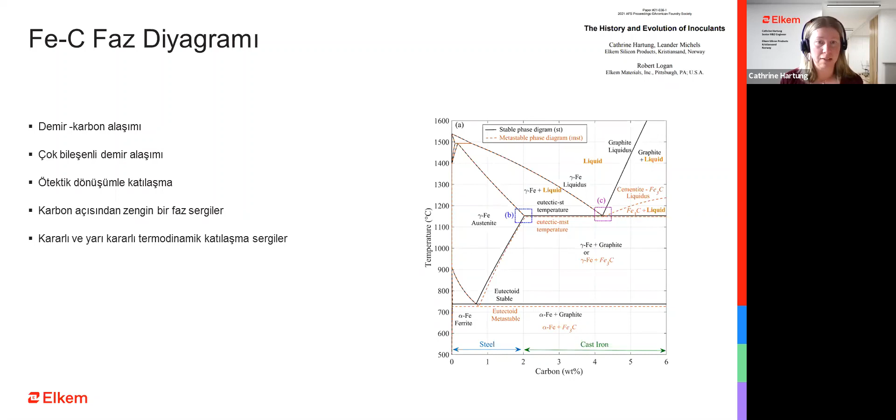In this slide, we see a close-up of the eutectic point, and we see that this system actually consists of two. The eutectic point represents the transition from liquid to solid. For cast iron, what happens here is that a simultaneous nucleation and cooperative growth of the iron-rich phase, austenite, and carbon-rich phase takes place.

In cast iron, the carbon-rich phase can either be graphite if it solidifies according to the stable system, represented here with the black lines, or it can solidify in the form of cementite or iron carbide if it solidifies according to the metastable system. A majority of commercial cast iron grades rely on carbon coming out as graphite to obtain the required properties, and solidification according to the metastable system needs to be avoided.

From this iron-carbon phase diagram, we see that the temperature window between the stable and metastable system is 4.6 degrees in this case, or around 5 degrees. But fortunately, cast iron is much more than iron and carbon, and the good thing about these other elements in cast iron is that they increase this window from around 5 degrees to around 60 degrees. So to avoid cementite, solidification has to start, and preferably end, between these two lines. The closer you are to the eutectic, the black line, the more safety you have against forming carbides. And it is here that nucleation and nucleation potential come in.

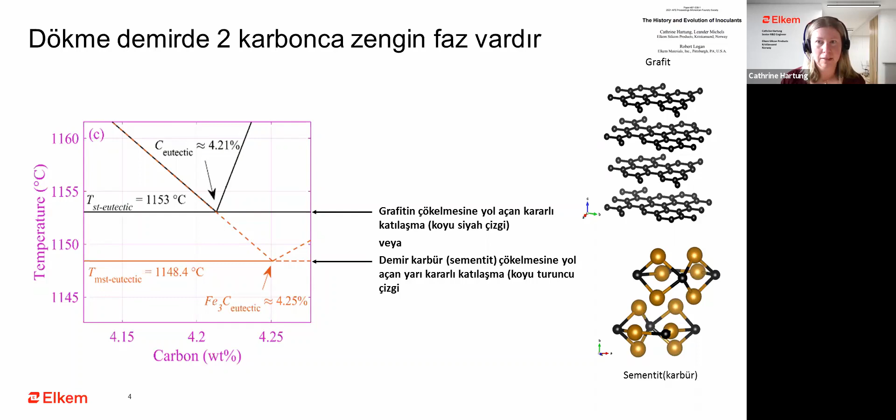The nucleation of graphite in cast iron will be heterogeneous, as it requires less undercooling, within the temperature window shown before, maybe 5 degrees, but with the chemistry you could have a window of around 20, 40, maybe up to 60 degrees. It is not feasible to have homogeneous nucleation, because that typically requires more than 100 degrees of undercooling before it can start. So both gray and ductile iron rely on heterogeneous nucleation of graphite.

During heterogeneous nucleation, the graphite nucleates and grows from a foreign substrate. This process requires less undercooling and is in line with observations from thermal analysis and microscopy data, which show solidification taking place at a higher temperature and lower undercooling than 100 degrees, without a lot of cementite in the structure. Nucleation potential is then a measurement of the number of suitable substrates for graphite nucleation, and says something about how easy it is to nucleate graphite.

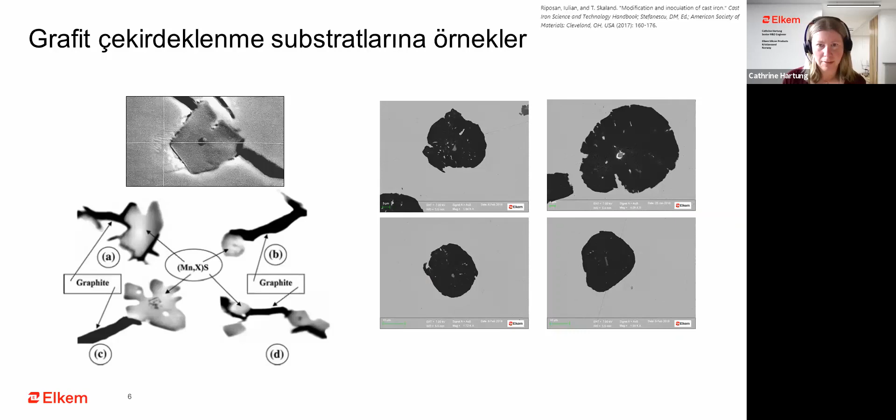With inoculation, what we want to ensure is that as much as possible of the solidification takes place within the stable system, giving us carbon in the form of graphite, either as flake, compacted, or nodular graphite.

The effect of inoculation can easily be seen and measured on a chill wedge, as shown here. I am holding different chill wedges from an inoculation trial in gray iron, where we used different inoculants on the same iron. As you can see, there are different amounts of white in these chill wedges.

The terms gray, mottle, and white are reflected in the fracture surface and are a measurement of the amount of chill. When I say white, or a light area, in these fracture chill wedges, this is the carbidic amount of solidification. The zone with a mixture of both gray and white is called the mottle zone, and where it's completely gray, you have the stable solidification, or graphite coming out.

So this fracture surface of a chill wedge is a very easy measurement that can be used for measuring inoculation or nucleation potential, as it gives an instant response, and it can also show differences between different irons or different inoculations.

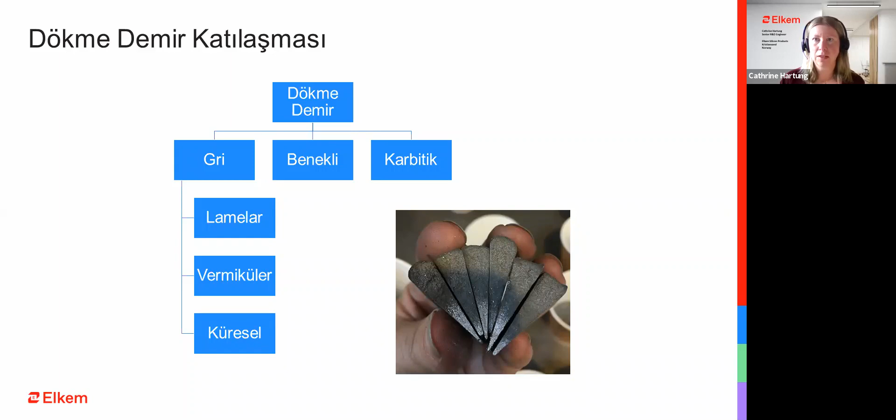Here are the different types of graphite in cast iron, where graphite grows differently: either lamellar, compacted graphite, or nodular structure. The chill wedges are easy to use for gray iron and partly for vermicular iron. For ductile iron, you need to cut and polish them to see the same structure shown here.

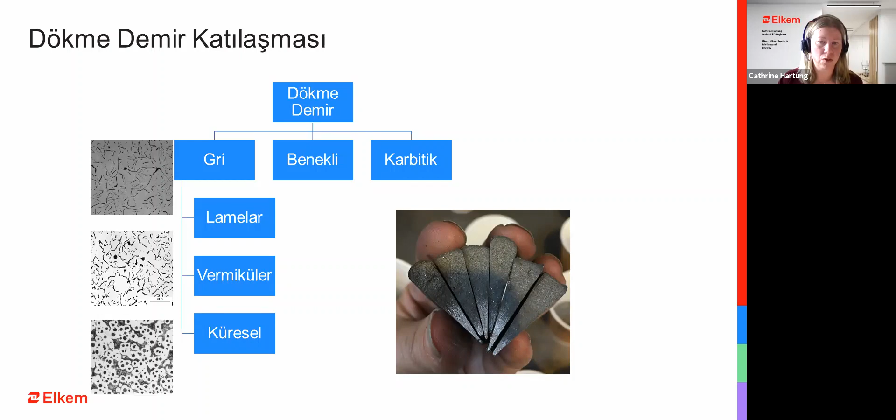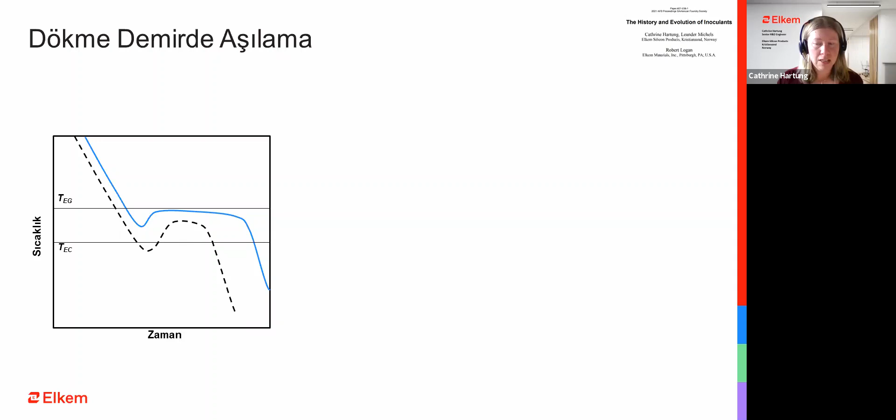In this slide, we will take a look at the principal effect on the cooling curve and microstructure of gray and ductile iron from inoculation. The cooling curve, which we can see here, comes from thermal analysis. It's a time temperature curve of the solidification process, so phase transitions are seen as arrests, and this curve can be used to evaluate nucleation conditions of the cast iron. The line TEG is the solidus line for stable solidification, where carbon is precipitated as graphite, while TEC is the solidus line for metastable solidification, where carbon is precipitated as cementite. This reflects back to the phase diagram and the black and orange line: TEG is the same as the black line, while TEC is the same as the orange line.

One key parameter often looked at, which we have learned from the slides on solidification and nucleation is important, is the undercooling needed before solidification starts. This undercooling can be seen in the cooling curve as the temperature difference between the low eutectic temperature and the TEG line, and this is the low point that you see before it increases again and flattens out.

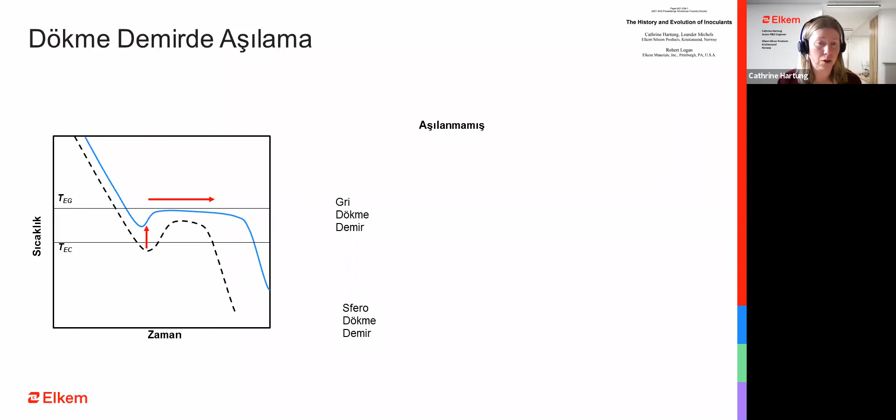If you press again, you see the vertical arrow represents the TE low, and you see that inoculation lifts the curve. So instead of having solidification starting below the metastable line, the solidification now starts between the lines. The other part that inoculation does is give you a longer curve, so you have more carbon coming out as graphite when you inoculate compared to when uninoculated. The blue line represents inoculated, while the black dotted line represents the uninoculated condition.

As you can see, before you inoculate, the structure looks either in gray iron, a mixture of undercooled graphite and better looking graphite, while in ductile iron you predominantly have carbidic structure because your solidification starts below the metastable line, though you get some nodules coming out. But predominantly it is an undesirable structure.

So inoculation, press next, transforms the structure from unacceptable to acceptable. The purpose of inoculation is to change the structure from carbidic and undercooled to fully flake or spheroidal graphite. This gives you the properties you're after in cast iron, compared to a hard, brittle material, which is the result if you have solidification according to the metastable system.

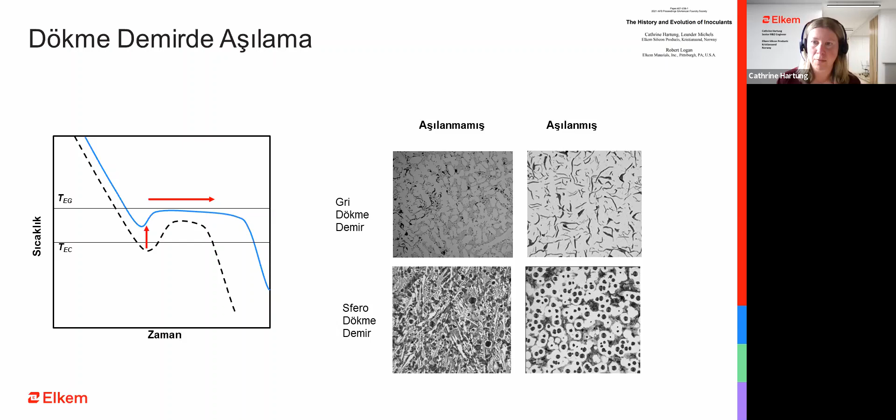Next. So the goals of inoculation are to avoid the formation of carbides and promote formation of graphite. You reduce segregation and reduce shrinkage. You have improved machinability and a more homogeneous structure and properties throughout the casting. It reduces hardness and increases ductility.

Next. So what is an inoculant? By definition, an inoculant is an alloy which, when added to cast iron, modifies the structure and thereby changes the mechanical properties. These alterations in the structure and properties cannot be explained by the minor changes in the chemical composition of the iron resulting from the inoculation.

The difference with a good inoculant is that you can use so little that you do not change the composition of the iron itself. If you have to use a considerable amount of inoculant, you will also experience a change in chemical composition, because normally the inoculants used today are based on ferrosilicon or have silicon, and silicon will change the carbon equivalent of the iron itself. But if you have an inoculant that is highly effective, the addition is so little that it shouldn't have an effect on the chemical composition itself.

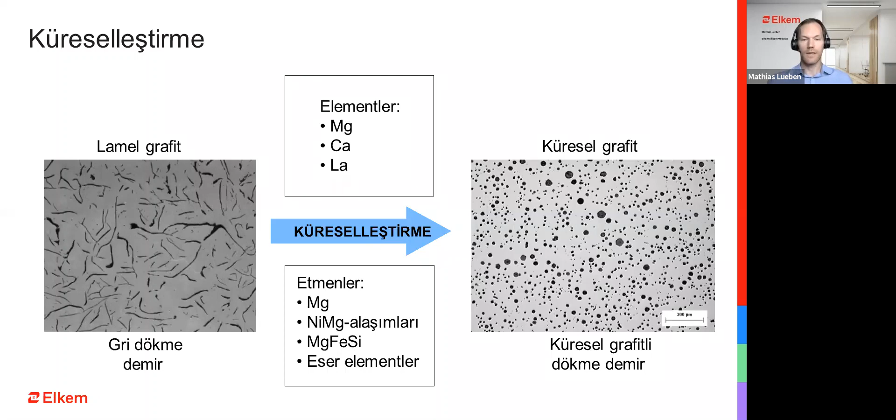Let's have a look at the efficiency comparison. Just a quick look at the upper left side. Treatments with high magnesium content or pure magnesium, like cored wire or the converter. The use will result in a violent reaction with lots of fumes and slag formation. We will have a low magnesium recovery and no inoculation effect at all.

Take a look at the green circle. Treatments with low magnesium containing alloys will result in a high magnesium recovery with proper inoculation effect. And the treatment will cause less fumes and slag formation.

So at the end of the day, with a magnesium ferrosilicon treatment, you will achieve a high treatment efficiency, reduced fume and slag, a cleaner iron, superior metallurgy, low consumption of magnesium, reduced energy cost. You will improve your casting yield, and in the end, you will get lower reject rates.

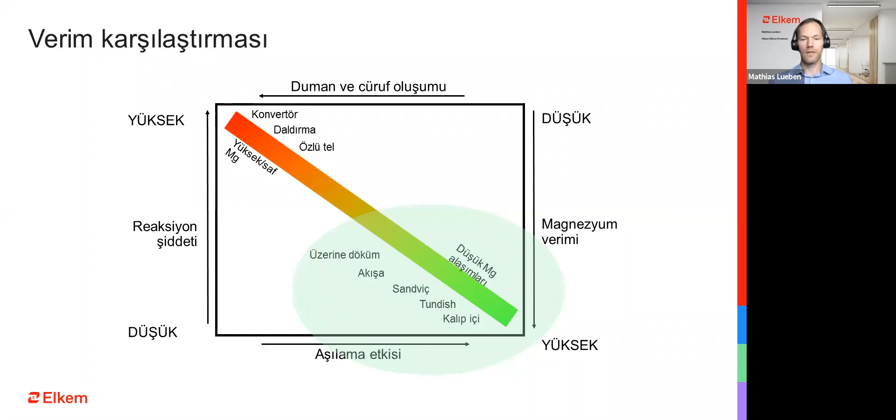Here you see a comparison of different ladle treatment methods. On the left side, the simplest approach, the pour-over treatment. In the middle, the sandwich treatment. The treatment alloy is covered with a cover alloy. We will talk about this later.

And on the right side, the advanced treatment process, the Tundish cover. The ladle is covered with a lid, and at the bottom, there's a pocket for the treatment alloy and the cover alloy.

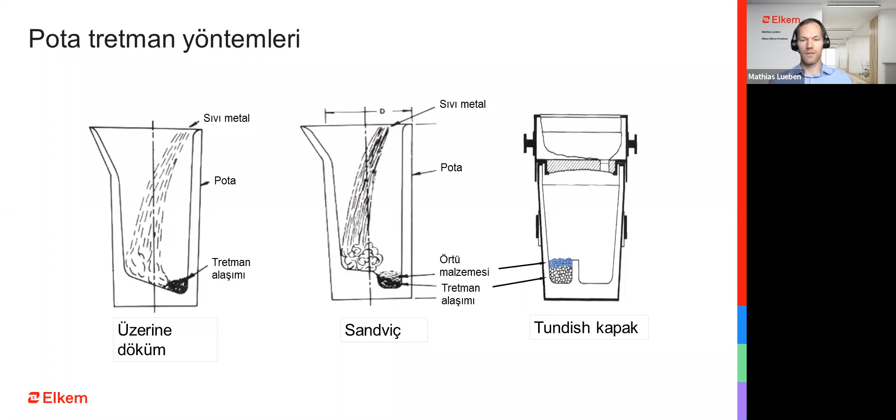Some aspects on ladle and pocket design. An optimized ladle design achieves the following advantages. You will get a high recovery, as you can see, with a proper height to diameter ratio of 2:1.

It is possible to achieve high magnesium recovery of about 80% with a consistent reproducibility. With this kind of ladle construction, there's no flare and about 90% fume reduction without any metal splashing. Minimum carbon and temperature losses are also achievable.

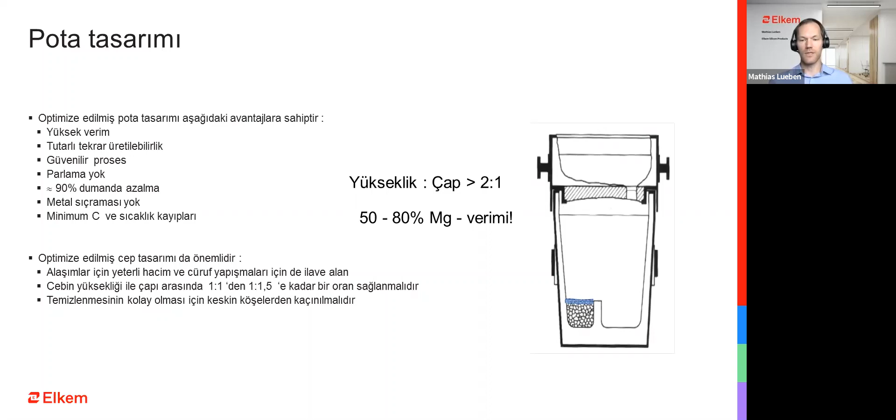Also important is an optimized pocket design. Please think of a sufficient volume per alloys and additional safety space for build-up. Ratio for the pocket of 1:1 or up to 1:1.5 between height and diameter of the pocket is recommended. Important is also a pocket without sharp corners, which is easy to handle to keep it clean.

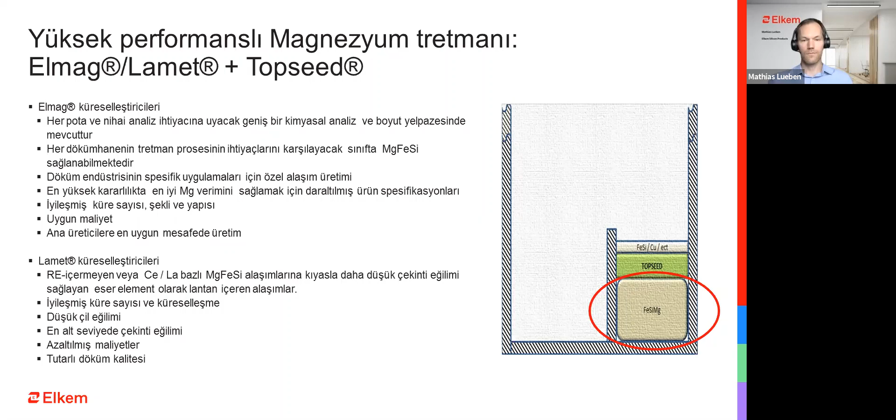Next slide, please. And again, one click.

Let's move over to our cover alloy, Topseed. A sandwich cover is recommended to obtain maximum treatment recovery. The purpose is to retain the alloy in the pocket for as long as possible before the reaction starts.

Topseed addition compensates the negative effect of magnesium treatment. It will add further inoculation effect. This can be seen in thermal analysis curves. It stabilizes the metallurgical quality after treatment, providing more robust processes, and this is reflected in the structure and mechanical properties of the casting.

Topseed is available in two versions with 2 or 5% barium and in 2 different grain sizes, as mentioned in the table below.

Topseed with barium is able to provide effective management of slag behavior. The result is cleaner iron, important especially for automated pouring equipment. The iron is less prone to promote slag and dross inclusions. Finally, it will result in a longer lifetime of the refractory.

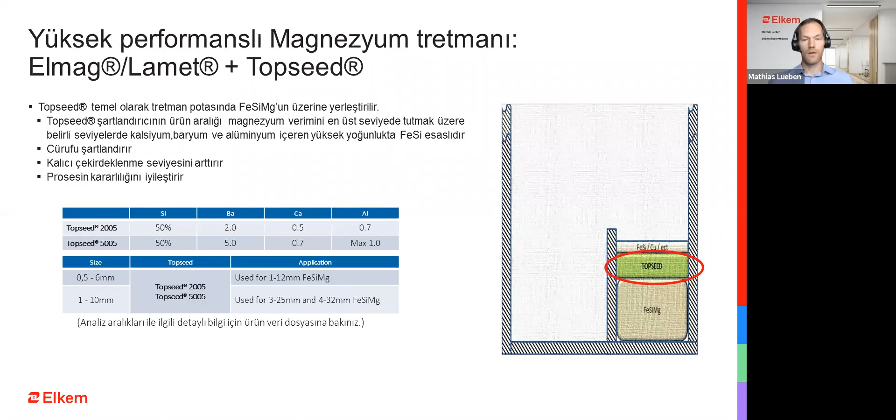Typical addition rates of Topseed are 0.3 to 0.4% of Topseed 5 for well-designed ladles and pockets, and low magnesium containing FeSiMg. About 0.7 to 1% Topseed 2 is recommended for poorly designed ladles and pockets with high magnesium containing FeSiMg. To explain it a little, a poor ladle is one with a low ratio between height and diameter, no pocket, or also a low ratio.

Or a pocket so tight that it's really hard to clean. A good, well-designed ladle, on the other side, has got a ratio of more than 1.5 between height and diameter. The Elkem recommendation is a ratio of 2. It also has got a well-designed pocket with a ratio of up to 1 to 1.5, no sharp corners, and easy to clean.

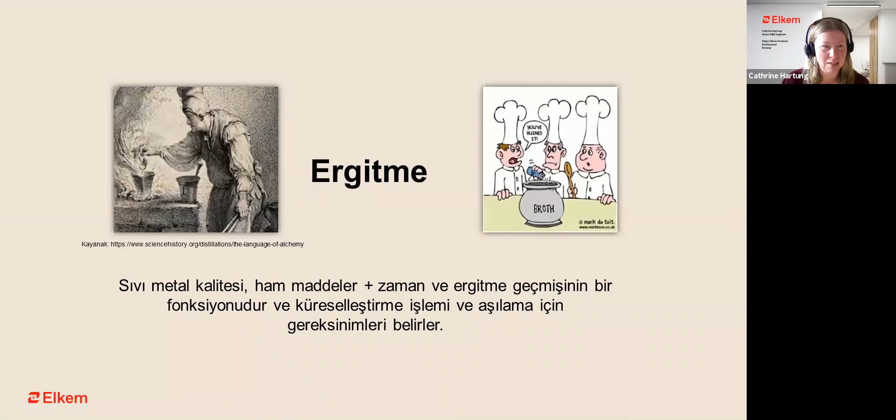First, melting is actually what determines the melt quality. So the choices that you make when it comes to the raw materials, the time and the temperature you use, or the history of the iron, determines the requirement for nodularizer treatment and inoculation. It's like cooking: to make a good soup, you have to have good ingredients and a good plan or recipe. Same with cast iron. Next slide.

So the job of the inoculant is to ensure that the solidification occurs above the metastable line. And the closer it is to the stable line, the black dotted line, the better the structure will be.

Here in this case you see an example from our lab in Kristiansand, where we have 3 different irons. The first iron here is uninoculated gray iron, and you see the actual curve with the actual structure. As you're improving the inoculation, going from uninoculated to adding inoculant—but this can then be not adding enough, or a different type of inoculant—it will change how this curve places itself between the 2 lines. But the purpose of the inoculant is that it should lift the line as close as possible to the eutectic, and the solidification should stay and end before you dip below the eutectic metastable line. But as you can see, with inoculation, the structure improves.

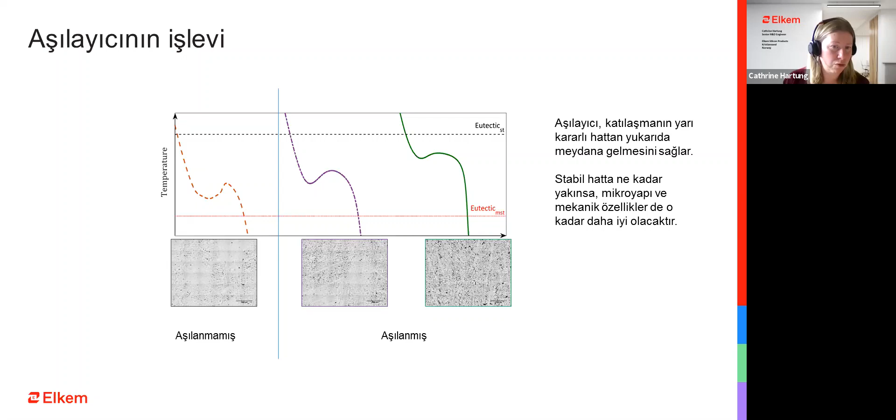We have to go back a little bit on the iron. Next slide. So take a recap from the first presentation and look at the phase diagram and the eutectic. We have the 5-degree difference between the stable system, the black system, and the orange system, which is the metastable.

Cast iron, luckily, consists of more than just iron and carbon, and all of them affect the stable and the metastable line—they can either push these lines together or open them up. One of the most important elements, which we have a lot of in cast iron, is silicon. Silicon is really nice because it opens up this window: instead of 5 degrees, depending on the silicon level, it becomes 20 to 60 degrees. That gives the iron more time to get nucleation started and to complete the solidification in time. So that's the recap.

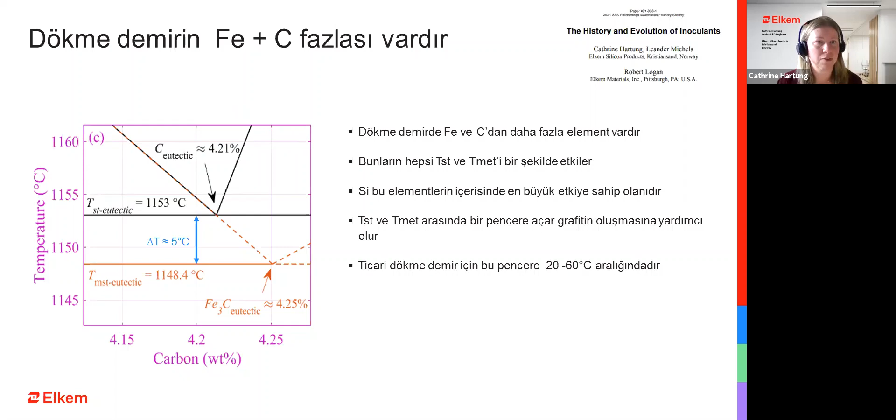And then we come to nucleation potential and thermal analysis. Thermal analysis can be used to read nucleation potential of a melt. I used a figure here from the article referred to at the top of this slide from Novacast. Thermal analysis is actually just a time temperature curve, as mentioned.

The different points in the curve have defined names and represent the solidification. The TL is the start of the liquidus, and the TE low is the lowest temperature before nucleation starts of graphite.

There are different names of the different parts of the curve depending on which kind of software you're using, but the arrests and the different parts of the curve are the same regardless of which thermal analysis system you're using. It's just a slight difference in where the definitions or points are, depending on how the software smooths the curve. But the parameter of interest when it comes to nucleation potential is the TE low.

The TE gray here represents the eutectic stable line, while the TE white represents the metastable line. The nucleation potential is then the temperature difference between the TE low and the TE white line, or you can measure it versus the TE gray line.

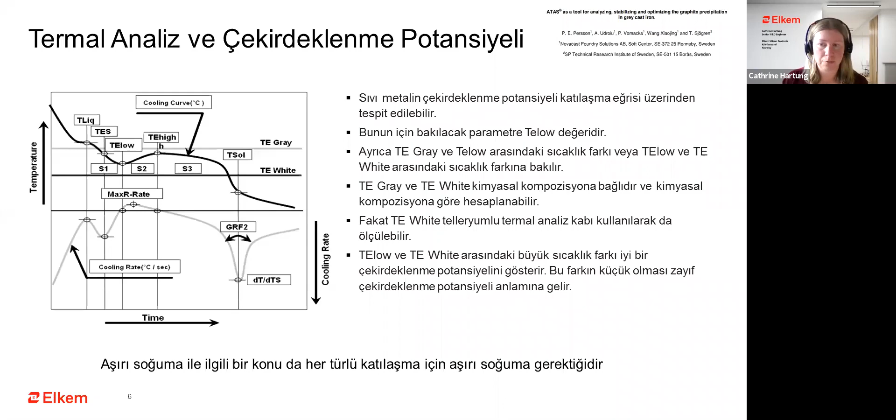Next, to the difference between gray and ductile iron. In gray iron, the nucleation condition improves with increasing carbon and carbon equivalent. You can say that gray iron is actually a self-inoculating material, or the inoculation condition improves with increasing carbon and carbon equivalent.

This is represented here on the curve to the right, where you have a representation of the liquidus temperature, which is the line that crosses down to the stable eutectic temperature. Then you have delta T, which is the undercooling after inoculation, and delta T0, which is the undercooling needed before you inoculate. As you see, the undercooling before inoculation in gray iron improves with improving carbon equivalent.

So as a result of this, it is expected to see a decrease in undercooling needed to initiate graphite nucleation with increasing carbon in gray iron. And TE low as a result of this will also increase with higher carbon and higher carbon equivalent.

So ultimately, a high strength gray iron will typically have lower carbon content or carbon equivalent, and will therefore have more undercooling because you are more to the left in this diagram, versus a high carbon equivalent gray iron.

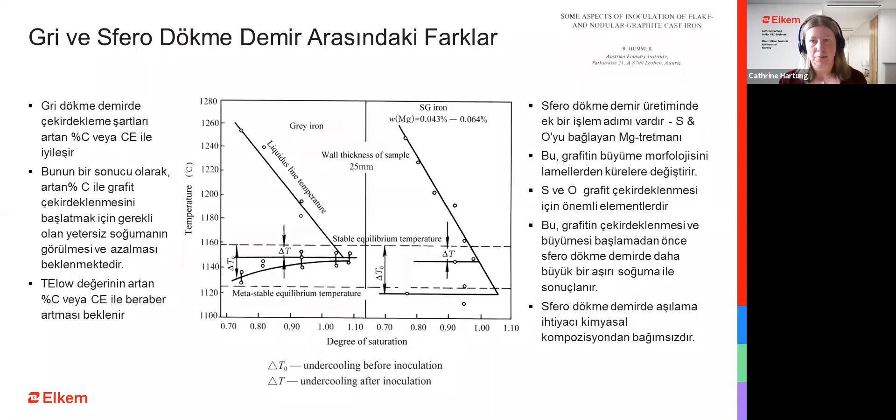Next, we come to our first example where we compare superseed versus foundry grade ferrosilicon. I think one of the most popular inoculants in gray iron production is just ferrosilicon, or foundry grade ferrosilicon.

The other very popular inoculant used in gray iron inoculation is superseed, or strontium containing inoculant. In this slide, we see a comparison of superseed versus foundry grade in two types of gray iron: one with low carbon equivalent, around 3.9, to the left, and one with 4.4 to the right. So you have what we call low, or hypo, and hyper, or eutectic gray iron.

We show the different parameters typically associated with nucleation and inoculation, which is chill. And then we have the most common thermal analysis parameters used. We have TE low, the recolescence, the graphite factor 1, which is the length of the curve. I believe in the EPIC or Elkem thermal analysis system this is equivalent to the LET, or is it ST? And the graphite factor 2 is the angle at the end of the solidification curve. Then we have the solidus temperature.

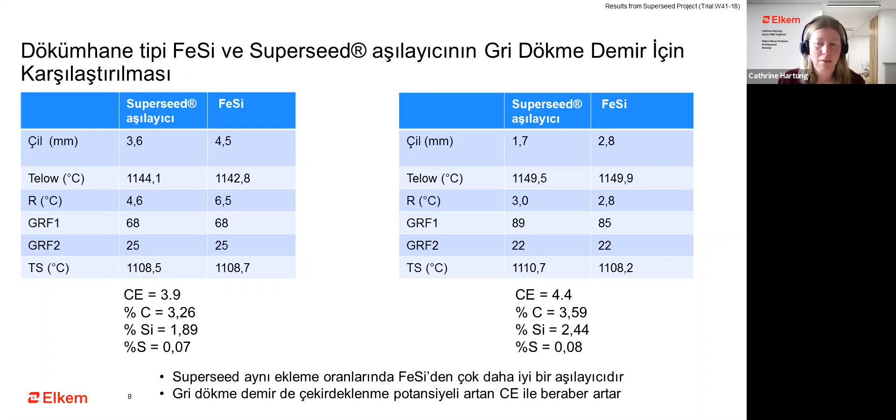Now we go to the next case example. Superseed inoculant was developed specifically for high strength gray iron back in 1966. At that time, the inoculants used were ferrosilicon, high silicon ferrosilicon, or this SMZ type inoculant. But for all of these, you had to add quite a lot to get chill reduction, and with a larger addition you also change the chemical composition. So superseed brought the possibility to add considerably less.

Remember, at this time the dominating inoculation method was ladle inoculation. Today we are stream inoculating. But it's still designed to give maximum chill reduction with the lowest possible addition, and thus minimum additional silicon, so you retain the maximum amount of strength from the chemistry of the gray iron — because in gray iron it's predominantly the carbon equivalent that determines the strength. You use silicon to offset carbide formation during solidification, but at the expense of higher shrinkage risk. This was a very successful product when launched, and today we see many different strontium containing inoculants from many different suppliers.

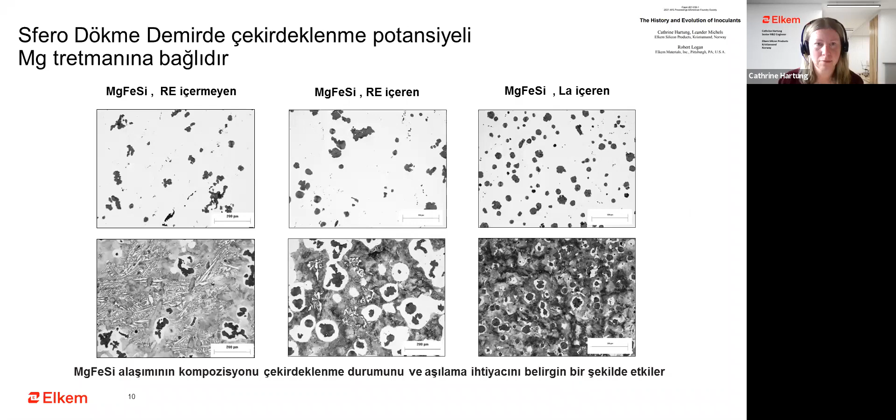So we go to an example in ductile iron and look at the difference in performance of Reseed and Foundrisil. Foundrisil is a calcium barium inoculant, which can be used for both gray and ductile iron, while reseed is a cerium-containing inoculant specifically developed for ductile iron, especially ductile iron treated with pure magnesium, or where there is low sulfur and oxygen after the treatment, where you have a high need of an inoculant and a good performance of the inoculant.

For ductile iron, it's common to look at nodule density and nodularity along with the thermal analysis. We don't look at chill levels, although we could do that too, but it's not primarily how you measure the nucleation performance. In this case, we see that reseed is providing a higher nodule density and nodularity compared to Foundrisil.

In this case here, the iron in question was a solution strengthened ferritic ductile iron of the type 600-10. The main thermal analysis parameters are also better with Reseed than Foundrisil in this case. You see a higher TE low, you see a higher TS specifically, and the recoalescence is lower. For these SSF irons, the solidification is different than the typical ductile iron, so the graphite factor 1s and 2s are not always as good as you can see with your standard ductile iron.